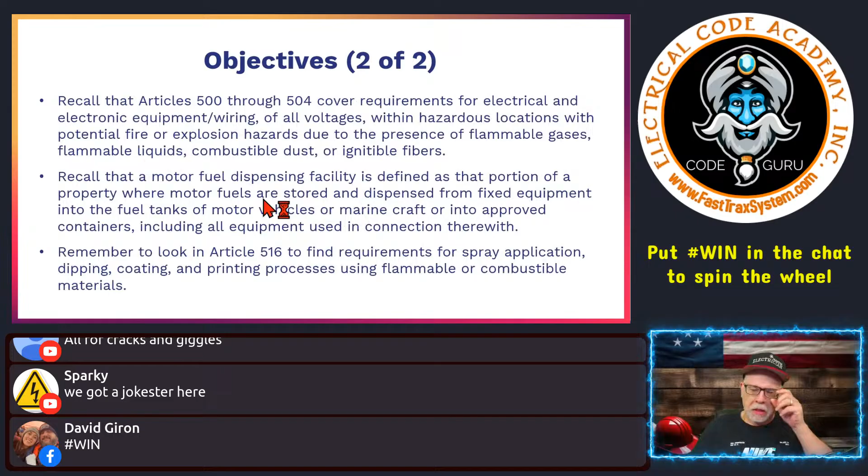We will recall Articles 500 through 504 cover requirements for electrical and electronic equipment and wiring of all voltages in hazardous locations, where potential fire or explosion hazards exist due to the presence of flammable gases, flammable liquids, combustible dusts, and ignitable fibers and flyings.

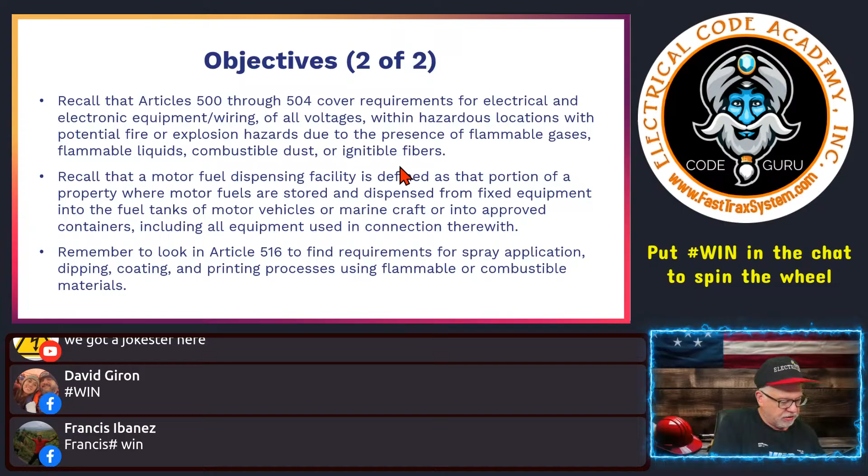Okay, hold on a second real quick. I've got to make sure I mute this. Otherwise, I'm liable to get calls right in the middle of it.

Next, recall that a motor fuel dispensing facility is defined as that portion of the property where motor fuels are stored and dispensed from fixed equipment into the fuel tanks of motor vehicles or marine craft or into approved containers. I found out the other day that a normal gas can is not technically approved for diesel. I couldn't see that anywhere, but that's what somebody told me. I don't take things for gospel, but I was told that. Including all equipment used in connection therewith.

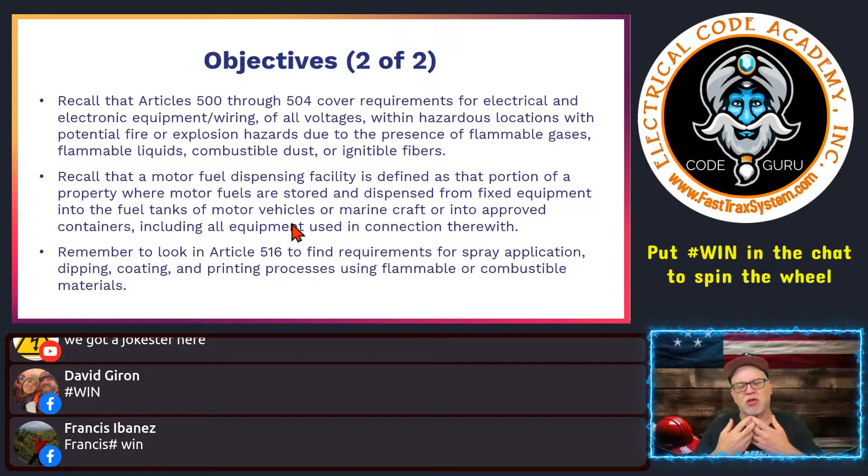Remember to look in Article 516 to find requirements for spray application, dipping, coating, and printing processes using flammable or combustible materials. We'll look at that very little; we'll cover the top of it. This is to introduce you to hazardous locations, and when I tell people to study for exams, this is something I'll give you, a little thing that I do with people.

If you're not studying for an exam and you're just out in the field and you say, well, how do I get better at the code to make my job better? And you might be one of those guys that say, I never look at the code book once I got my license. This isn't a place for you. If you're one of those kind of guys, what the hell are you doing here? Really? Because these are about people that want to keep learning about the code, dig into the code, always striving to learn more. But you need to test yourself outside of a comfort zone.

If you feel like you struggle with motors, then one of the things that you do is spend a training session. You've heard me say this before. When you're studying for an electrical exam, how much time should you be putting into study? You should be putting in at least 3 months, 90 days, studying at least 2 times a week for 4 hours each session. And if you're studying for an exam and you don't have the time to do that, you probably don't really need to be an electrician. You probably should go do something else. Just saying. We have to put in the time to study to get it right and pass that exam the first time, right? So you got to put in the effort.

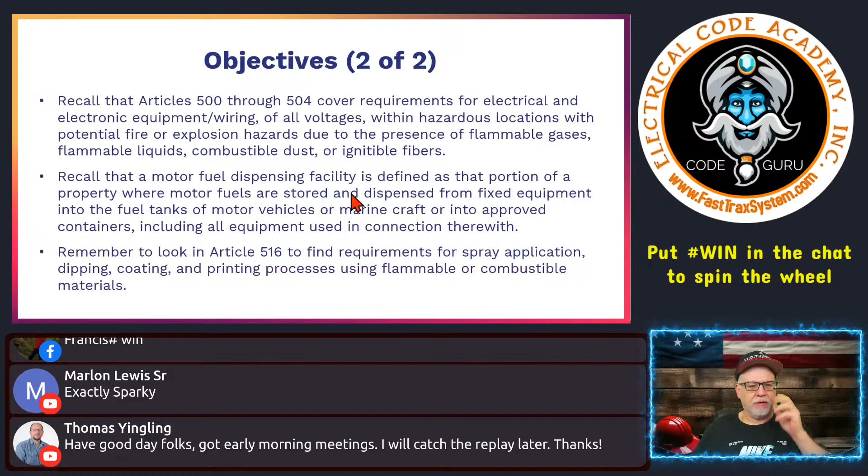Introduction. Hazardous locations are divided into certain categories and subcategories, otherwise known as classes and divisions. Class 1, Class 2, Class 3. And then we have Division 1, Division 2. Division 1 is more restrictive than Division 2. Articles 500 through 504 cover the requirements for electrical and electronic equipment and wiring of all voltages. That's another thing to remember. This is an all voltage application. In Class 1, Division 1 and 2, Class 2, Division 1 and 2, and then Class 3, Division 1 and 2.

One of the things that you can prepare yourself for in an exam, and it's easy to remember, is that Article 500 gives you the overreaching requirements for hazardous classified locations. Then 501, think of the 1 for Class 1, goes into flammable vapors and liquids. So that's what 501 is. 502 is combustible dust, so think of 502 as Class 2, should be easy, right? And then you get into easily ignitable fibers and flyings, and that's 503. So think Class 3, that type of area.

Now, the severity of the condition, we'll talk about the different things with each class at a very high level, because I tell people all the time, I can teach you the code, I can teach you hazardous classified locations, I can teach you what you need to pass an exam, I can answer your technical questions, and I serve a lot of questions from the commercial side about hazardous locations. As far as being the definitive expert at hazardous locations, no. There are a few of those out there that I hold in high esteem, the go-to person for something like this. I am very proficient with hazardous classified locations, but there are some folks that, that is all they do. They specialize in it, right?

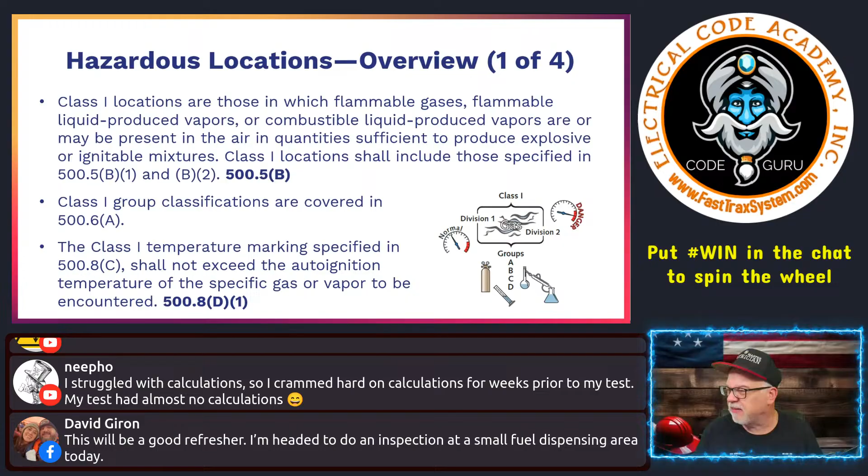Okay, so again, we're in 500, and I'll show you what that looks like. So let's kind of go here. I don't want to lose your comments, so we'll go right here and deal with it. Okay, I'll push this down. So here's 500. You notice how this one is kind of the whole ball of wax, right? This is everything. So it's going to be a lot of general information here to be aware of, talking about the different classifications and whatnot. And then when you want to dig down deeper, say you have an exam question, then you dig down into 501 or 502 or 503, depending on what you're dealing with, okay? And you'll have different group classifications in class 1, temperature markings in class 1, all those type of things. So again, we cover all the general stuff in 500, all right?

So in this case, it was 500.5(B). So we'll go down real quick to that. So here's the classifications of locations, okay? This is very important because we have to establish that first. What do we have? What class are we dealing with? All right, so it says locations shall be classified depending on the properties of the flammable gas, flammable liquid-produced vapors, combustible liquid-produced vapors, combustible dusts, or fibers and flyings that could be present, and the likelihood that a flammable or combustible concentration or quantity is present.

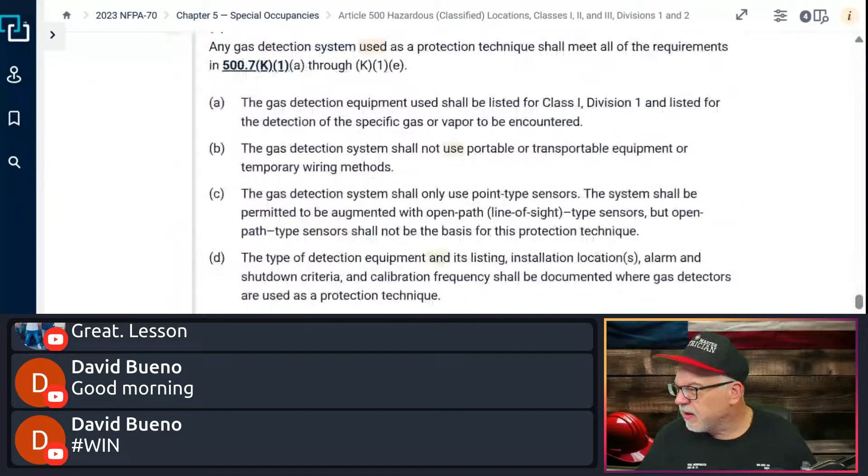And then lastly, we'll cover each little piece here because it's going to be a lot in these episodes. Let me cover this one real quick before I go into all these little things.

Equipment, 500.8. Notice that this is grayed out or tanned out. That signifies that it is a change, so if you see this in your code, it means verbiage changed. So explosion-proof or dust ignition-proof equipment shall not be permitted to be used at temperatures lower than negative 25°C unless they are identified for low temperature service. I can see that on an exam.

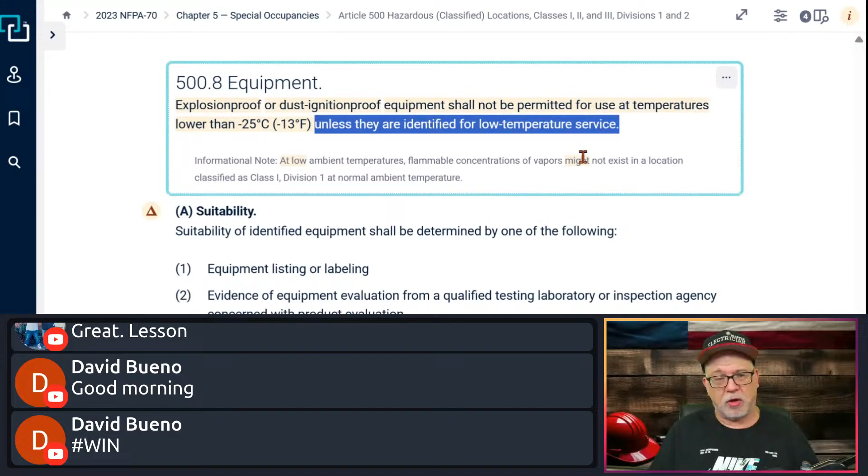So they don't mention that it's identified for an application, they give you a temperature and tell you it's explosion-proof, and they ask, is this acceptable? And the answer would be no, unless it's identified for those low temperatures. If it is equal to this or greater, then it does not have to be identified for low temperature service. Based on its listing, it's still explosion-proof or dust ignition-proof equipment, just for applications negative 25°C and above.

And the only other one real quick is the markings, which we'll cover right this second. So all types of equipment utilized inside these hazardous locations: equipment shall be marked to show the environment for which it has been evaluated. Unless otherwise specified or allowed in 500.8(C)(6), the marking shall include the information specified in 500.8(C)(1) through (C)(5).

And what does that mean? That means the equipment utilized inside this hazardous location has to have its class marking on it, to where it's suitable for use. It has to have its division marked on it: the marking shall specify the division if the equipment is suitable for Division 2 only. Equipment suitable for Division 1 shall be permitted to omit the division marking.

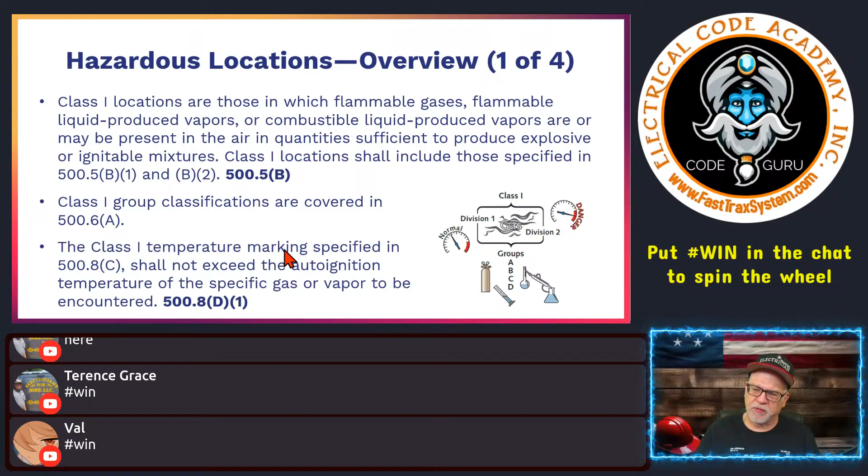So we kind of covered all three of these. Class 1, temperature, marking, specified. Oh, we didn't really cover all of them. Let me get back here real quick. So that was also one of the things that have to be marked. It has to be marked with the material classification group, which was what we just saw, right? We have to know what group or class it is, like I said, A, B, C, or D, or E, or F, depending on the equipment. It says the marking shall specify the applicable material classification groups or specific gas, vapor, dust, or fiber flyings in accordance with 500.6, okay?

And equipment temperatures. Here you've got a nifty little table down here: classifications of maximum safe temperatures. Temperature classes are called T codes. They'll be marked on the equipment. You ought to be able to look at the T code class, and then go over here and see the maximum temperatures, and you'll have a list that corresponds with the T code marked on your actual equipment. And then of course you have all of this information here that you should go back and read. We'll cover pieces of it as we go.

But again, we're doing a 30,000 foot view here on Coffee Hour. We ain't got but an hour. And I've already gone over an hour because of all the welcomes that I do. All right, let's keep going now.

All right, so Class 2, that was Class 1. Class 2 locations are those that are hazardous because of the presence of a combustible dust. Class 2 locations shall include those specified in 500.5(C)(1) and (C)(2). So again, back at 500, because 500 gives us the list, right? That's going to say, well, what are we talking about when it comes to combustible dust? And that's what we looked at right here. These are any of them that are going to create this type of environment.

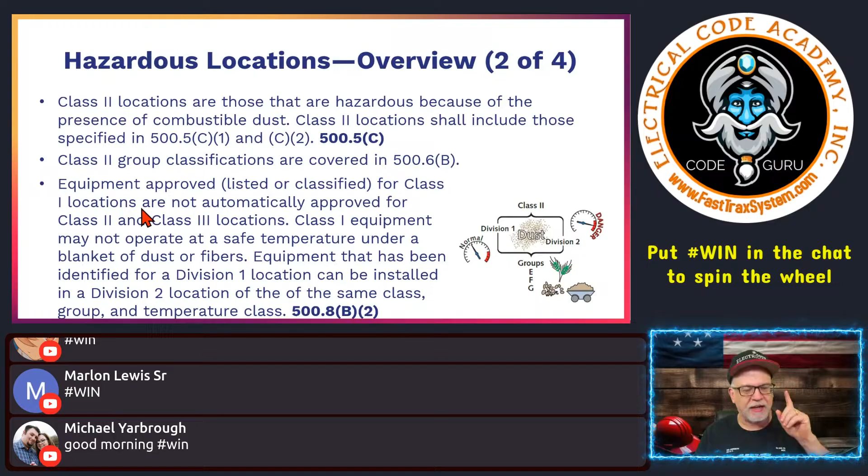Kind of said it, but remember, this is now talking about the different classes, class 1 to class 2. Equipment approved, listed, or classified for class 1 locations, which remember was flammable vapors, gases, things like that, are not automatically approved for class 2 and class 3 locations. Class 1 equipment may not operate at that safe temperature under a blanket of dust or fibers.

So it may have been evaluated under a certain temperature, its T rating, based on its atmospheric condition and where it's located. But you take that and you're thinking, well, dude, it's a class 1. It's more sealed. It ought to be perfectly fine in a class 2 or class 3. But think about the class you're using it in. The class 1, it's not going to be covered in anything that's going to allow that heat to build up. It's basically open air.

Whereas if you deal in class 2 or class 3, it could develop a coating of dust on it or fibers or whatnot. So it will be insulating it, and the heat could rise up. We don't want that, okay? We still are dealing with volatile, flammable applications, right?

So it's saying just because it's class 1, don't automatically assume that it can be used in a class 2 or class 3, okay? Class 1 equipment may not operate at a safe temperature under the blanket of dust and fibers. Equipment that has been identified for a Division 1 location can be installed in a Division 2 location of the same class, okay? Class 1, Class 2, Class 3.

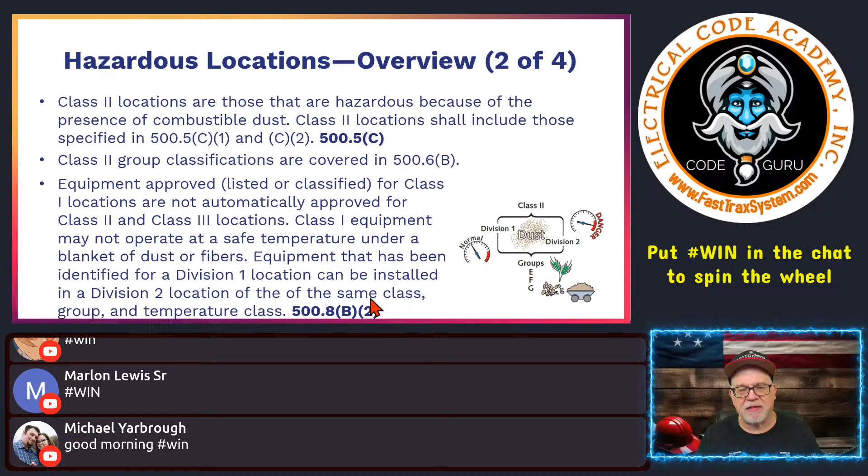So Division 1 can be used in Division 2, but again, don't assume that the Division 2 can be used in a Division 1 unless it's been evaluated to be used in both, okay? I have to reiterate that because that's an important thing to remember and can get confusing for people.

Now, class 3 locations are those that are hazardous because of the presence of combustible or ignitable fibers or flyings, such as rayon or cotton plant, that type of thing. You always have those little flyings in the air. Class 3 locations shall include those specified in 500.5(D)(1) and (D)(2). It's very much the same as what we had before, but we'll go look at these because, again, you never know what may be on an exam.

Okay, so we're looking at D, and there is no grouping, so let's look at 500.5. Hold on here. So here is 500.5(D), Class 3 locations. It says Class 3 locations shall be locations meeting the requirements of 500.5(D)(1) and (D)(2). So this is your Division 1. Gives you all the parameters here, okay? And then you have Division 2, essentially the same type of application.

We won't go into those because, again, it's just a matter of reading it. So it's not worth going too deep into those, okay? And again, there are no groups for this application. You're just looking for class ratings, okay? Class 3, that type of scenario.

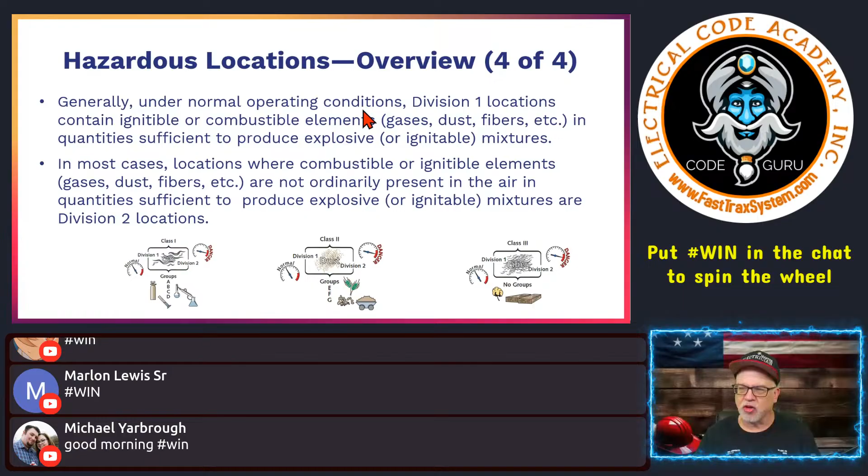All right, so hammering these things home: under normal operating conditions, every day, day in and day out, you walk into the room that they would classify as a hazardous location under normal conditions. Division 1 locations contain, under their normal application, ignitable or combustible elements, gas, dust, fiber, etc. Under normal conditions. We haven't gotten that far.

In quantities sufficient to produce explosive or ignitable mixtures. Okay, that's going to be a Division 1, depending on whether you're in a Class 1, Class 2, or Class 3. In order to understand the division, you need to know what is there under normal operation, that type of thing.

Now, in most cases, locations where combustible or ignitable elements, gas, dust, or fibers are not ordinarily present in the air in quantities that are sufficient to produce explosive or ignitable mixtures, then we're going to class those as a Division 2. It's less restrictive. It's more restrictive than an unclassified area, which is just a normal area, but you have to be careful because there are different allowable wiring methods that can be used in each one of those.

So all we're doing, one, is establishing the area. The engineers will establish the motors that are going in a certain area or the equipment that can go in a certain area based on its ratings and the location, those type of things. What's important to us as electricians is that we understand that we're going to be making connections in these locations.

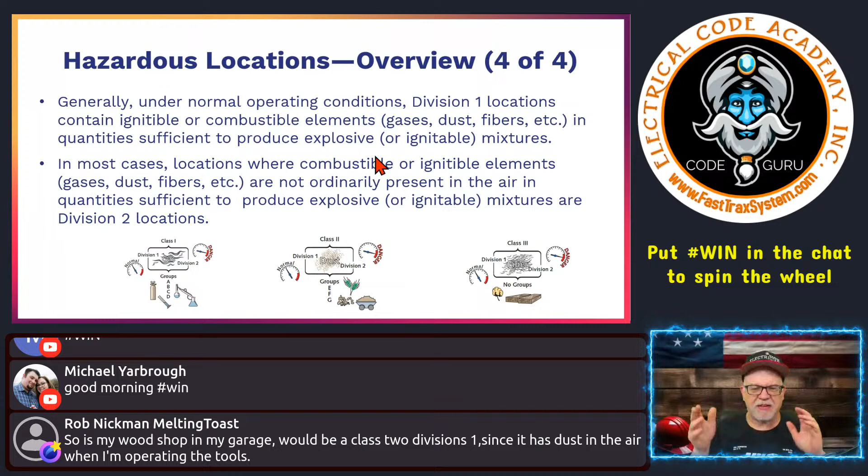And sometimes we have to double check the engineer to make sure that they didn't forget a seal off, or that maybe there's a piece of equipment that's being located and it needs to have a rating that maybe they missed. And you're their second set of eyes. They're not perfect. We're not perfect. So again, always keep your eyes on it. And again, realizing that something that may be a Division 2, you might say, well, you know what? I can use this in a Division 1. No, don't assume that at all.

All right, testing our knowledge. Let's see what you guys say. It says Class 2 locations are hazardous because of the presence of what? Flammable gases and vapors, combustible dusts, easily ignitable fibers and flyings, or explosive agents. Okay, what do you think? Class 2. You should know by now. And we'll just go 1, 2, 3, 4. Whatever your answers, put them in there. Let me know you're still here.

And I will look at Rob's question here. It says, so my wood shop in my garage would be Class 2 Division 1 since it has dust in the air when I'm operating the tools? It depends on the level of concentration. Okay, so you have to know the level of concentration. If it's just a personal residence, you're not going to have it there at those levels all the time, right? So just because you do some woodworking in your garage, it's not going to immediately say that you have a hazardous location. Under normal conditions means it would be there all the time. In your case, it's only there when you're working in the wood shop.

Now, you should take extra precautions and things like that, but I doubt you're going to have it at those concentration levels. And in your garage, there's a big difference also from combustible dust. So if you're working in a wood shop, chances are you're more of a possibility of being a Class 3. But again, is it at those volatile levels? Probably not unless you're working in there every day and it's part of your production. Then you'd be hard pressed to classify that location as such. That makes sense?